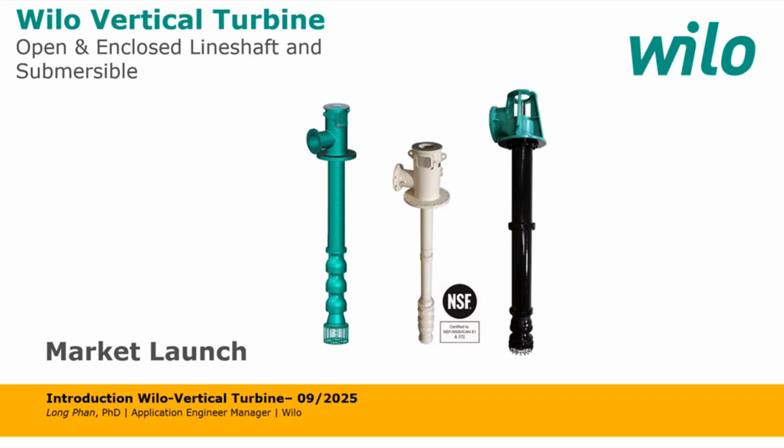Let's talk a little bit about the vertical turbine and benefits that we are offering. For standard vertical turbine pumps, we offer both open and enclosed line shaft design. We design them in modules and stages, so we can add stages as your total dynamic head requires. For up to 15-inch bowl, we have enamel lining for vertical turbine.

For standard construction, we offer cast iron bowl, bronze or stainless steel fitted for vertical turbine. For the axial and mixed flow pumps, we offer cast iron bowls, only bronze fitted at the moment.

We offer semi-open, open, and enclosed impellers. For bearing retainers, we have two styles: one is drop-in up to 12 inches of column, and welding for larger than 12 inches of column. Threaded or keyed line shaft up to 2 and 15/16 inches, and beyond that our standard will be keyed line shaft couplings. Threaded or flanged column pipes, we offer packing or mechanical seal options. Cast iron or fabricated steel discharge head, and we also offer suction can or barrel.

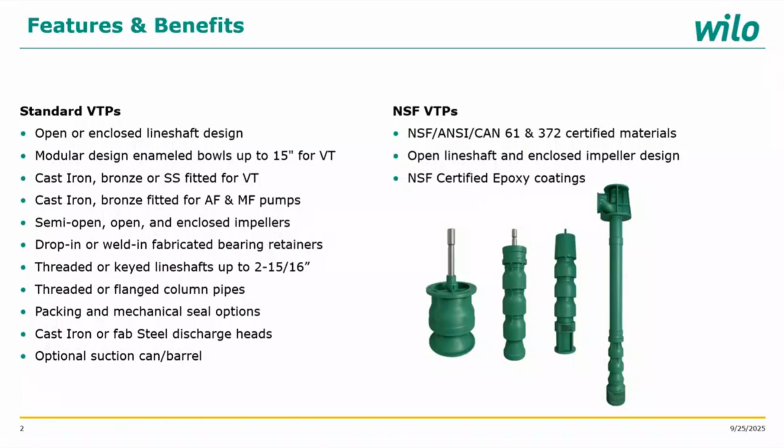As for the overview of the vertical turbine lines, we have 5 different model styles. The first one is the open line shaft, typically in short sets. This is our terminology for open line shaft, water lubricated short set -- anything between 20 to 35 feet that fits in a truck fully assembled. So these are open line shaft vertical turbines.

We also have the enclosed line shaft vertical turbine, the second style here, typically for deep set or lubricated well pumps. We also offer the fabricated vertical turbine where you have a can or barrel, and then you have a fabricated head and flange columns. We also offer the submersible style where you have the motors on the bottom of the bowl assembly, and the discharge head on top above ground.

Finally, we also offer the AF or MF, axial flow or mixed flow pump, for large flow and low head, typically in 1 or 2 stages. So the combination of these 5 style vertical turbine lines gives us over 150 plus models, ranging in flow up to 30,000 GPM or 6,813 cubic meters per hour, head up to 1,000 feet or 304 meters, bowl ranging from 5-inch to 42-inch, and discharge flange can range from class 125, 150, or 300. Packing or seal, like I said before, enclosed, semi, and open impellers.

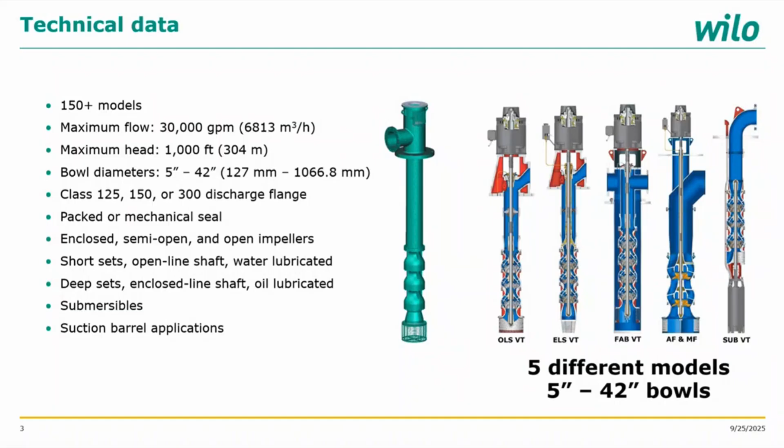So these are the snapshots of when we put them all into the flow and head. These are the ranges of our vertical turbine Wilo vertical turbine line.

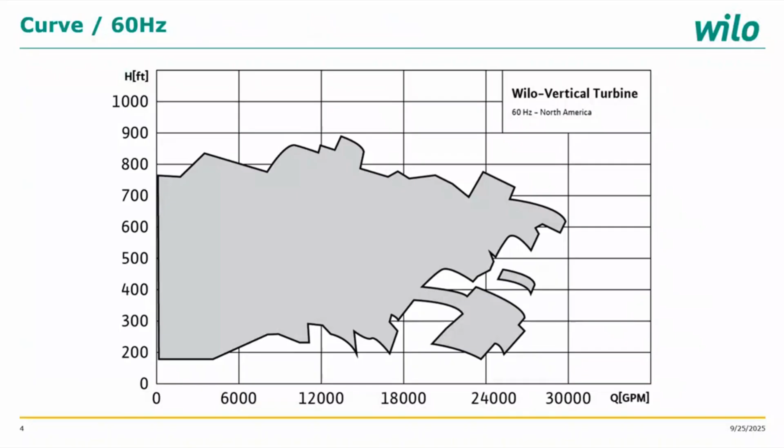So let's dive into the open line shaft, product lubricated design, and take a look at the anatomy of the bowl assembly.

You have 7, the bowl, and 6 is the bowl bearing. 8 is your impeller, 9 is the impeller wearing ring, which is optional. 10 is the collets, used up to 16-inch bowl.

Our standard is a taper style collet to lock, taper lock, basically to lock the impeller to the shaft. Above 16 inches, we use a key for connection.

11 should be the O-rings for seal, and 12 will be your bowl wearing ring, which is optional depending on the application. 13 is your sand cap, to keep debris and dirt out of the suction bearing.

14 and 15 is your suction case, and the suction bell is optional, typically for a water pit or water sump application. These are common for well applications, but a bell is not needed or required for a well pump.

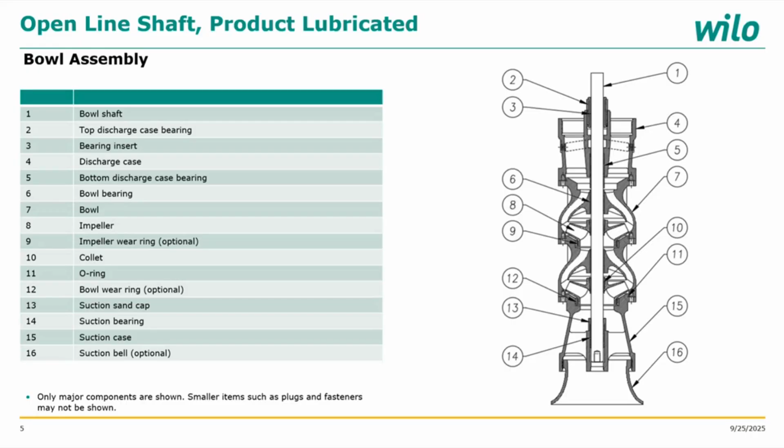Here, number 2 is what's called the inner column adapter. It acts as connecting the discharge case to the enclosed tube and the line shaft bearing on top. Below this is the bowl shaft, above this will be the enclosed tube. So this inner column adapter is very important for connecting these two assemblies.

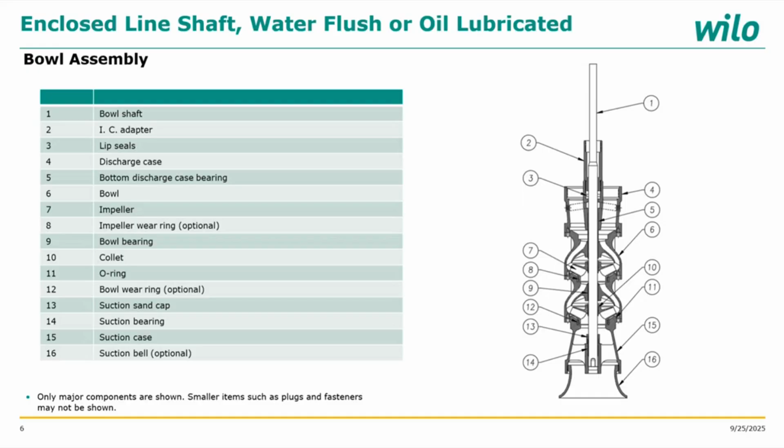For the submersible configuration, as I said before, the motor will sit on the bottom. Everything is the same from 5 to 14. The only difference is the motor sits on the bottom with the help of the motor brackets. 16 is your suction bearing.

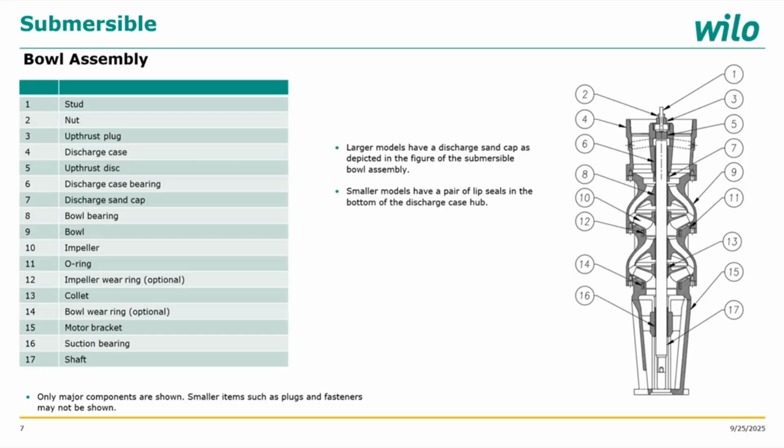17 is your shaft. Another differentiation is the top 1, 2, 3. Here you have the stud and the nut to lock it in place, number 3 which is your upthrust plug, and number 5 which is your upthrust disc. These two help prevent upthrust when the motor starts, keeping the shaft in place.

For impellers, we have 4 different styles: enclosed, semi-open, mixed flow, and fully open, for propeller and axial flow impeller connections.

Like I said before, collets are used up to 15-inch and smaller, and above 16 and larger we use a key for connection to the assembly. On request, that doesn't mean the impeller cannot use a key for the smaller size, but it's economically impractical to use a key. Still, on request, we can use a key for smaller bowl sizes.

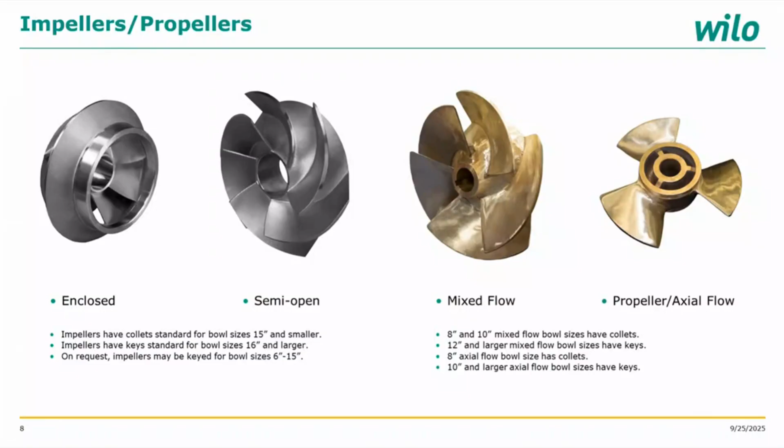For the mixed flow, 8-inch and 10-inch mixed flow bowl sizes use collets, and 12 and larger use a key. For the open axial flow, 8-inch uses collets, and anything 10 and larger uses a key for connection.

These are the line shaft couplings, and there are two styles. One is keyed, spanning from 1-inch to 4-inch, across the entire range of the shaft. Threaded is only available on the smaller diameter shaft, from 1-inch to 2 and 15/16 inch.

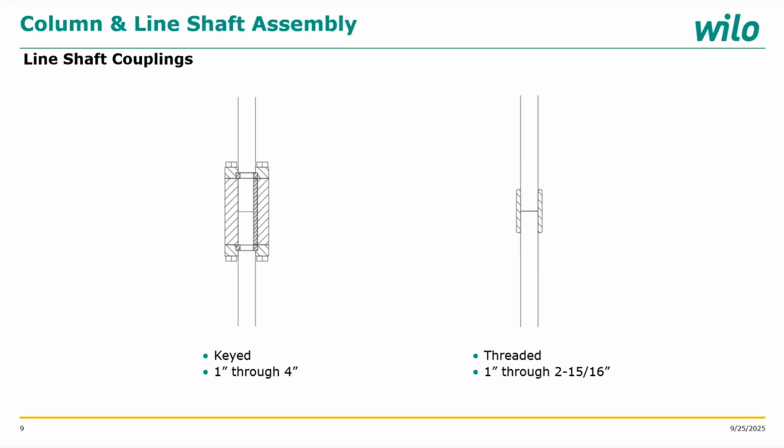The open line shaft, product lubricated. These are some of the configurations for column and line shaft assembly. Over here you see the column, number 1. With number 2 being your line shaft coupling.

Number 3 is the line shaft, this is a threaded line shaft coupling, with threaded and coupled columns. For this configuration, we have a threaded column with drop-in spiders, and 4 is your bearing inserts. Over here you have a flange column connection with threaded line shaft and drop-in spiders. Below, you have a flange column with welded-in spiders.

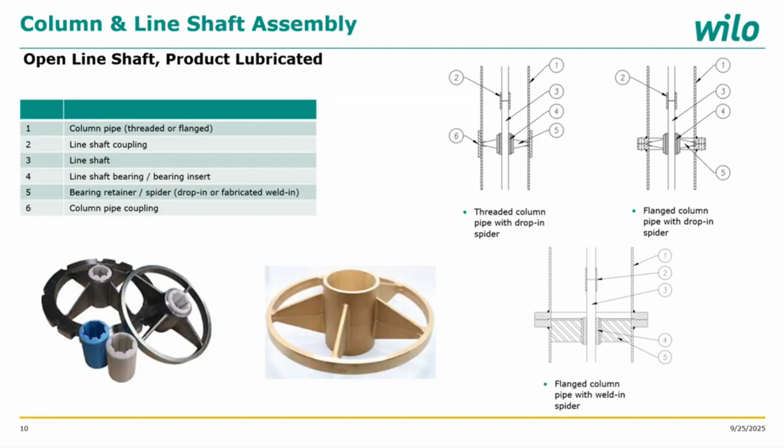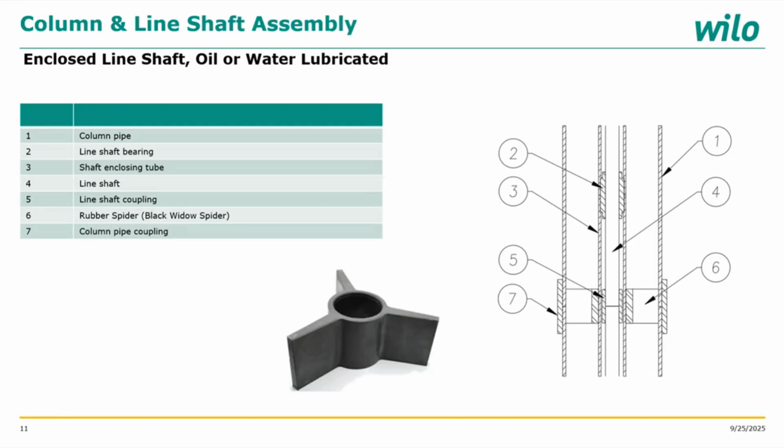The enclosed line shaft, oil or water lubricated. Here we show an example of threaded and coupled columns with a rubber spider, or what we call a black widow spider in the pump world. This is the enclosing tube, number 3 here. This is another configuration for the enclosed line shaft with rubber spiders, and here you can see the rubber spider example.

Let's talk a little bit about seals. For sealing application, we have in-house type 810 or 820 seals, depending on the pressure rating. For 810, the maximum pressure is up to 150 psi, and for 820 type, the maximum pressure is up to 425 psi.

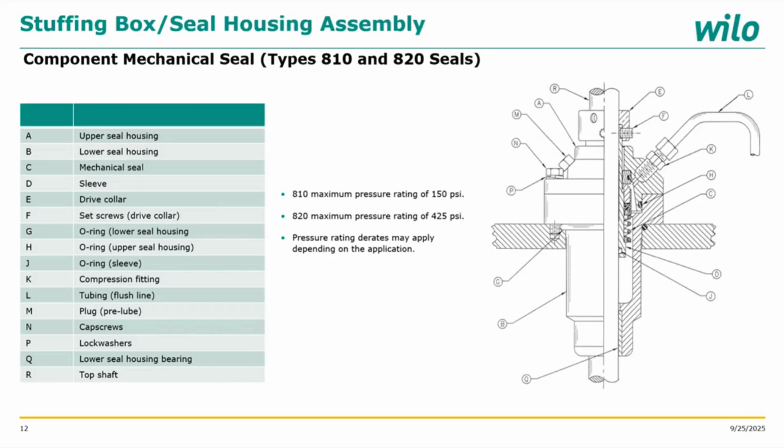For a packing seal, we have two types. One is low pressure. Over here you see the Zerk grease fitting, number 4. I've greased - this is allowed grease in this compartment to lubricate the seal, and you have packing to allow leaking.

Packing has to leak a little. So this shaded area here is your packing. The difference from a high pressure pack to a low pressure pack is just this assembly right here, items 12, 13, and 14. Those are the pressure relief line to protect the internal. So when the pressure is high enough, it will trigger this pressure relief through this relief line. That's the only thing different.

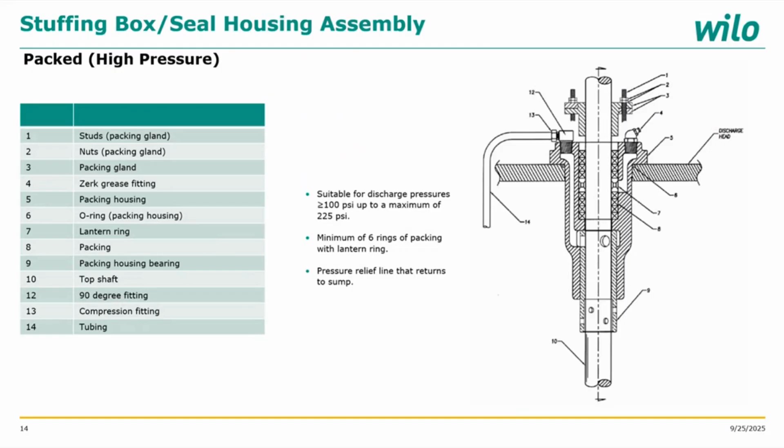As for the enclosing tube tension assembly, this is for tension tube kits. So for tension tube kits, you have compartment A here, which is your tension bearing, screw into C to pull C. C is your enclosing tube, so it pulls it to a tension.

You have this pipe here, we call it E, which is the tube oil, because by gravity oil will drip down into this shaft through this curvy line, which is the cutout of the shaft, so that oil can drip down to the shaft and lubricate it. So that is a tension tube kit for oil lubrication.

And for water flush, it's a similar design. The only exception is you have J, which is your tubing water flush that connects to an external source. Water is pressurized and pushed into this compartment for cooling and lubricating the shaft. Similarly, A screws into C, which is your enclosing tube, pulled into proper tension. It's very similar to the oil lubrication, except for this assembly J here, where you have an external water flush line into the system.

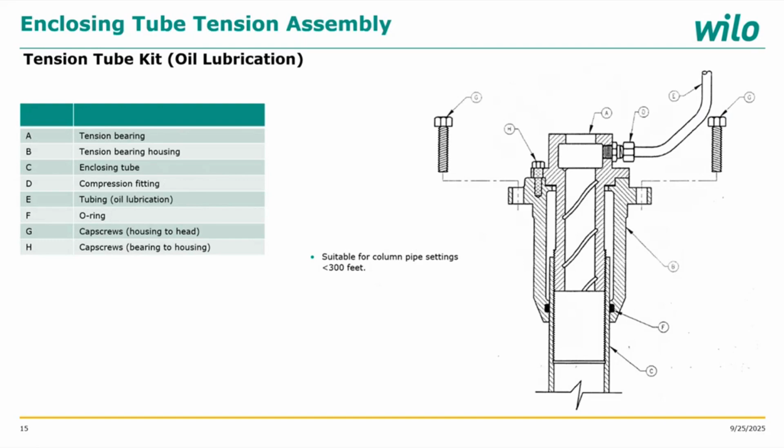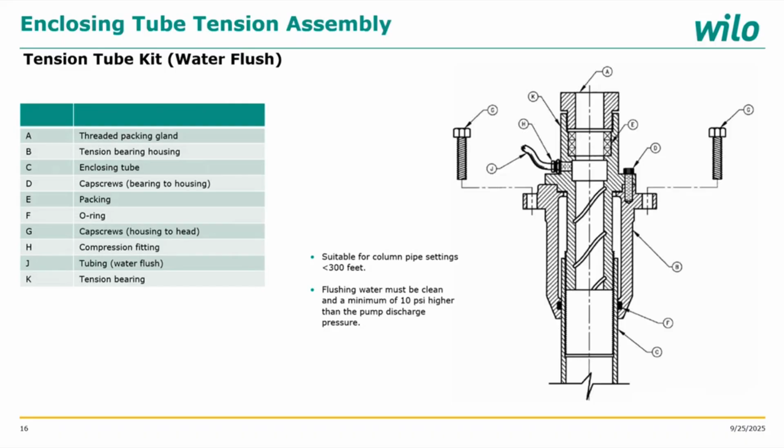So these tension tube kits for oil and water lubrication are suitable for column pipe settings less than 300 feet. But what if we have a setting larger than 300 feet? Then we use what is called strap tube kits. These are a robust, heavy duty design that can bear the weight of the columns.

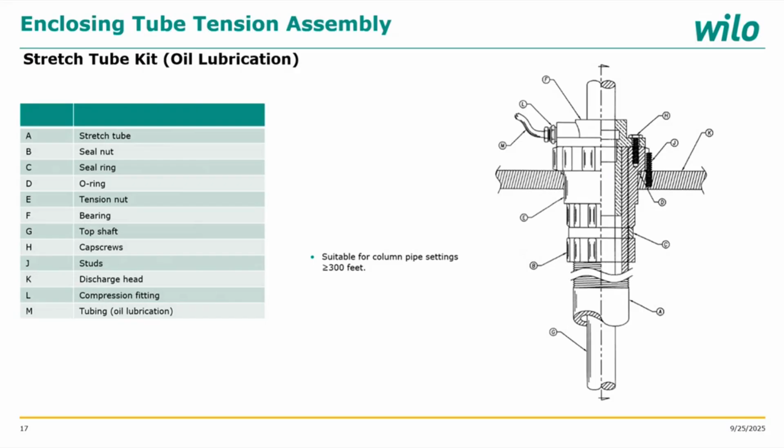Usually you have the oil inlet where by gravity we introduce oil into this shaft to lubricate it. Same concept, but for water flush we have an external flush line that goes into this to lubricate, and the rest is similar to the oil lubrication.

Discharge head type - we have 3 different discharge heads. We have cast, it is what it is, it's a cast head. For a fabricated head, we have F or L. The only difference is for the L type we have an ANSI drilling, but normally it's a round base ANSI drilling, whereas the typical regular fabricated head is the F style. The T type fabricated head here is used for barrel applications, where you have a suction inlet in the barrel, and you have this T type fabricated head.

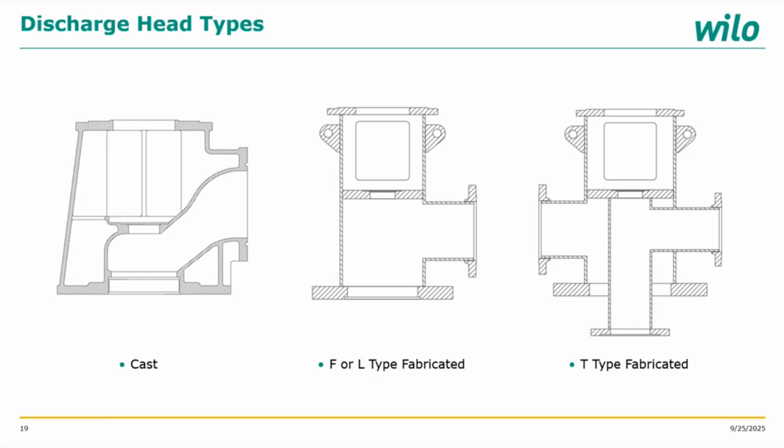The discharge head, typically for cast discharge head, we have 4-inch up to 16-inch, and 8-inch up to 16-inch. The 14 and 16 I put in bold, you've got to have the flange work with the flange columns. But any size 4 to 12, we can have threaded columns here.

ANSI B16.1 class 125-pound flat face discharge flange for the cast discharge head. And for the fabrication version, you can have the flange up to 150 or 300, raised face or flat face flange.

Below standard for all of the fabricated heads, we perform modal analysis with FEA performed on every head and motor assembly, basically above ground features.

The column pipe setting limits for cast discharge head is up to 500 feet. We have a direct connection, so we thread direct into the head, but between 500 and 750 feet we recommend using a steel hanger flange for the support, mainly for more robust support of the weight of the assembly. For fabricated discharge head, it can support up to a maximum of 750 feet of column setting, and above 750 feet is doable, but requires engineering approval on a case-by-case basis.

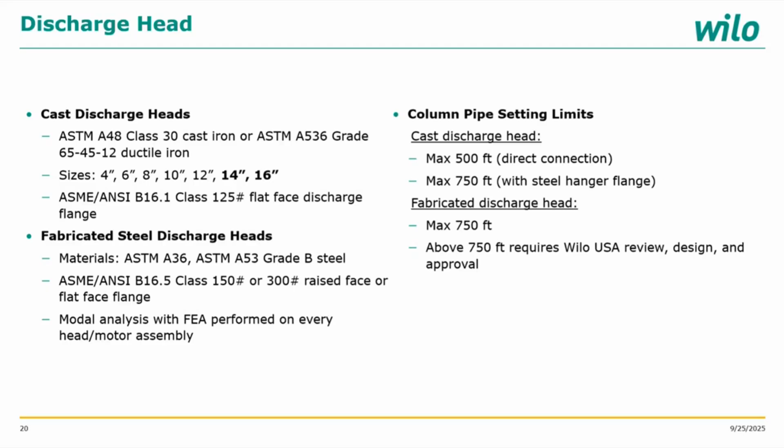So I just covered everything about the regular vertical turbine. Now let's talk a little bit about the NSF certified VLO vertical turbines.

So this NSF certified VLO vertical turbine inherits most of the features of the regular turbines, but since it's an NSF certified pump, we only narrow down to 67 models. It will do the full range of flow up to 30,000 GPM, up to 1,000 head. The bowl ranges from 6 to 42 inches.

It has NSF ANSI CAN 61 and 372 certified materials of construction. We can have class 125, 150, or 300 discharge flange, packing or mechanical seal, open line shaft, water lubricated, and closed impeller. At the moment, we can only offer open line shaft, and only in combination with closed impeller for NSF certified pumps.

Optionally, we can also have a suction barrel application. So on this table, you see one example. Every pump manufacturer with NSF certification has their own certified materials of construction. As for VLO, these are our standard offerings.

For bowl, class 30 cast iron, impeller 304 or 316 stainless steel. Optionally, we can also offer aluminum bronze C952 or nickel aluminum bronze C95800 impellers. Suction case bell is class 30 cast iron, discharge case is ductile iron, and bowl suction bearing is C954 aluminum bronze. But for bowl and suction bearing, we also have the additional option of C89835 bronze or bismuth tin bronze.

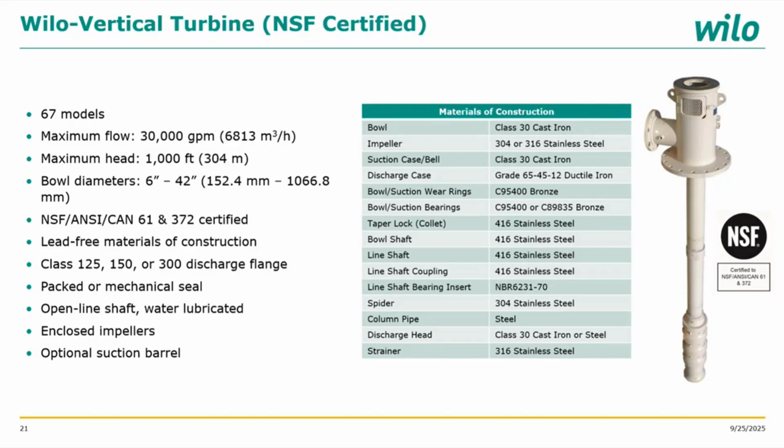The bowl assembly for NSF VLO vertical turbine pumps is similar, but there are some restrictions because of NSF certification. We have enamel lining for bowls up to 16 inches, O-ring sealing between bowls up to 15 inches. We have replaceable bowl wearing standard for all models, but optional replaceable impeller wearing is not standard on all models—only offered in enclosed impellers, not semi-open or open impellers.

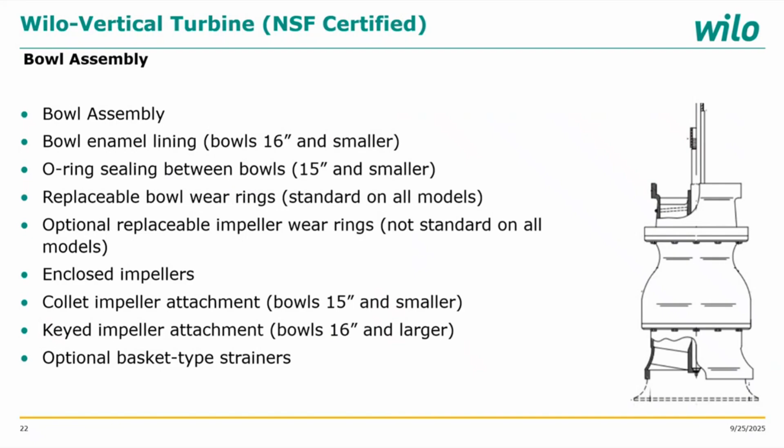The collet impeller attachment is up to 15-inch bowl, and beyond that it will be keyed. We also have an optional basket-type strainer, only in 316 stainless.

Let's talk a little bit about the column for NSF certified columns. This is only applicable for open line shaft design, no enclosed line shaft, just open line shaft. Water lubricated bearing, drop-in type bearing retainers for 12-inch and smaller. We can have threaded and coupled or flanged.

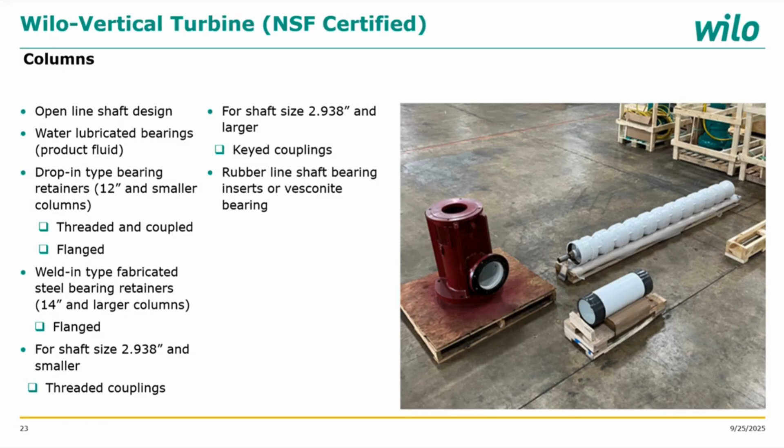For column size of 14-inch and larger, that will be a welded fabricated steel, and it must use a flange column. For shaft size of 2 and 15/16 and smaller, we use threaded coupling, and anything greater than 2 and 15/16 we use key coupling. Like I mentioned before, we use the rubber line shaft bearing insert or Vesconite hard bearing.

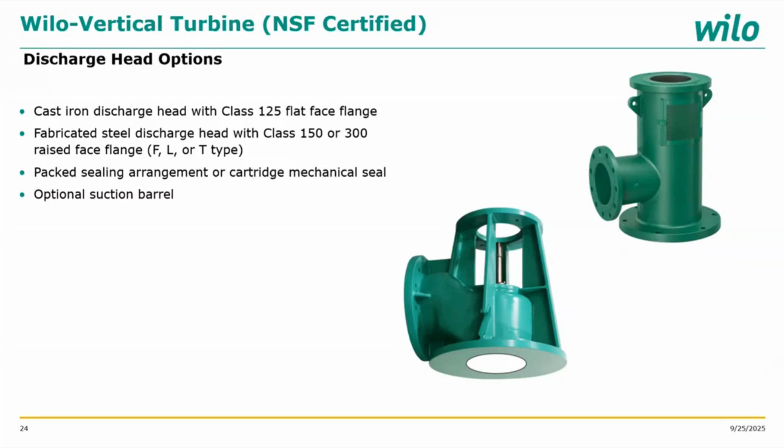Discharge option: we can have cast iron with 125 flat face flange, or fabricated steel discharge head with class 150 or 300 raised flange, FL or T-type. Here you see an example of the cast head on the bottom left, and the top right you see the fabricated head. It looks like an L style because you have ANSI drilling.

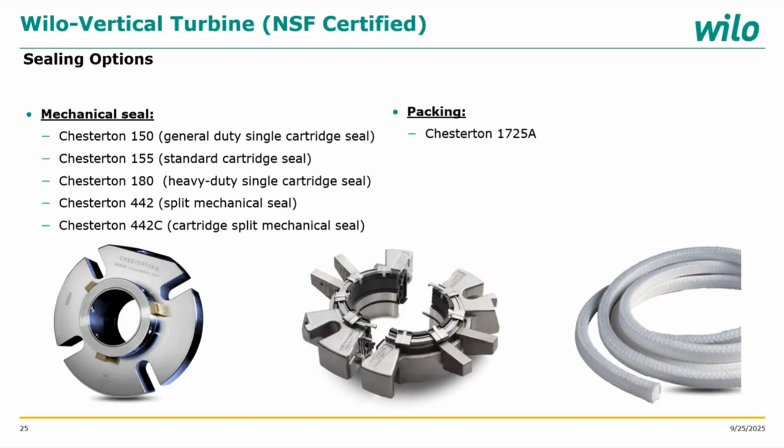They all split seal. For coating options, our standard coating is the Tnemec N140 Pota-Pox Plus. We also have fusion bonded coating like Scotchkote 134 or 206N. We also have other lines of coating, Tnemec 21 Epoxoline and 22 Epoxoline.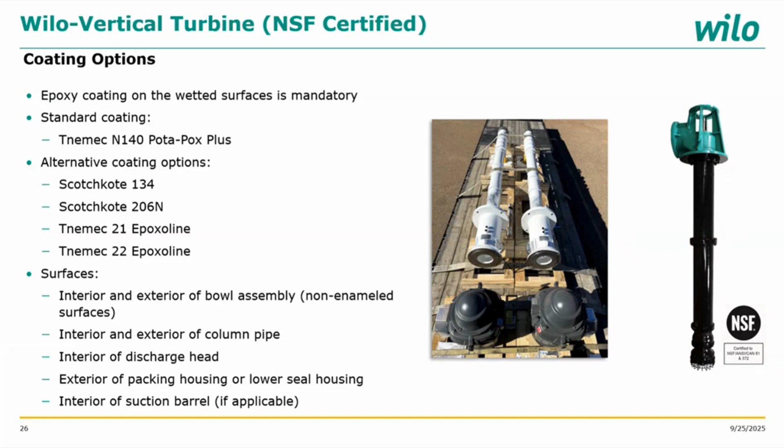Applicable surfaces where coating can be applied include ID/OD of bowl, ID/OD of columns, ID of head, OD of the packing housing or lower seal housing, and ID of suction barrel—basically all wetted surfaces that are in touch with the water.

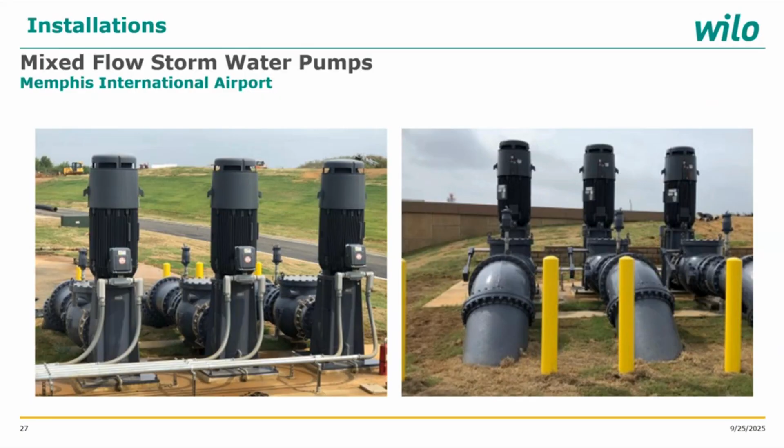Some applications: this vertical turbine can be used for example at Memphis International Airport for stormwater pumps—this is mixed flow pumps, I believe. We can also use it for water treatment plants; one example here is Lancaster, California. Or we can use this vertical turbine for pumping river water for agricultural applications or other uses.

So with that, hopefully I've provided some information for you guys.